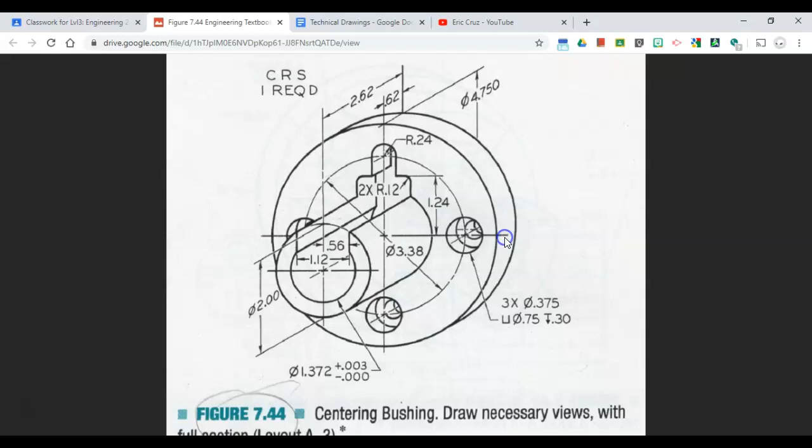Alright guys, we have figure 7.44 here, and what I want you to do is really look closely at the dimensions. This part is pretty straightforward if you can understand all of the dimensions that you see here.

So let's fire up Autodesk Inventor. Let's start a new part. This is all in inches, so we don't need to change any of the dimension properties. Start a sketch on the XY plane.

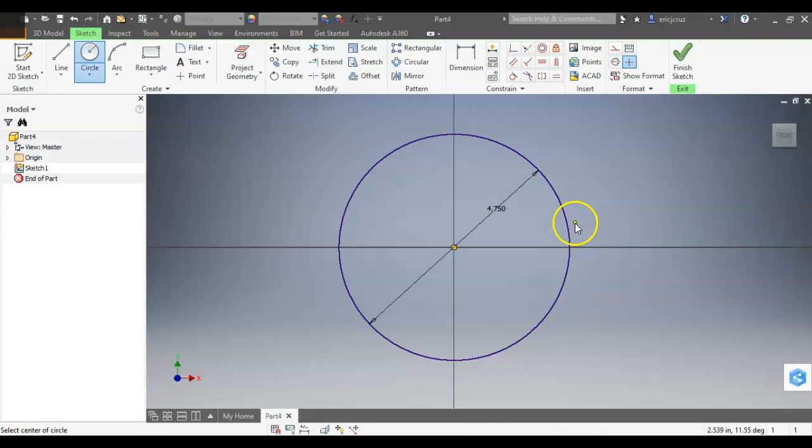Click on your circle tool and the origin, click and go out, and our big diameter here is 4.75. Enter. Use your mouse wheel to scroll in and out. Let's finish that sketch. Click on home.

That's 0.62 thick, we see that right here. So extrude by 0.62. Enter.

Then we're going to make this cylinder. So right click, new sketch on that circular surface. Start at the origin, and it shows right here the diameter is 2 inches. Enter, and finish sketch.

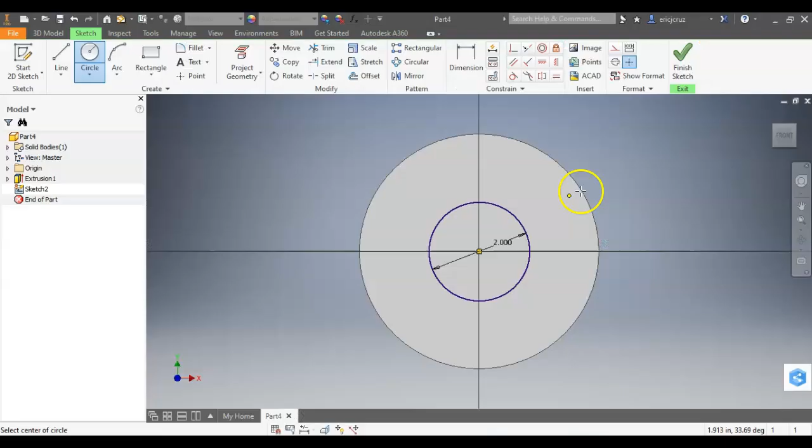It says it's coming out from the back edge to right here, 2.62. We know that this is already 0.62, so from this surface we only have to extrude out 2 inches. So extrude, click that, type 2, and enter.

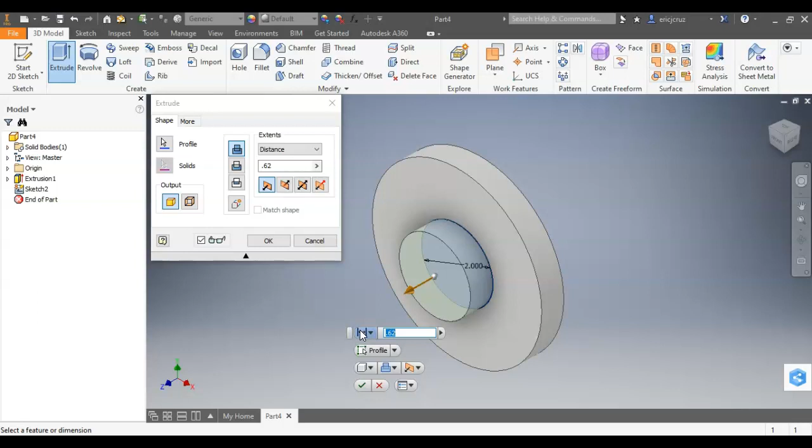So now we have the basic shape all done. We're going to cut this hole out, and then we'll cut like a rounded square or rectangle, followed by this keyhole, and then we'll make the points for these holes.

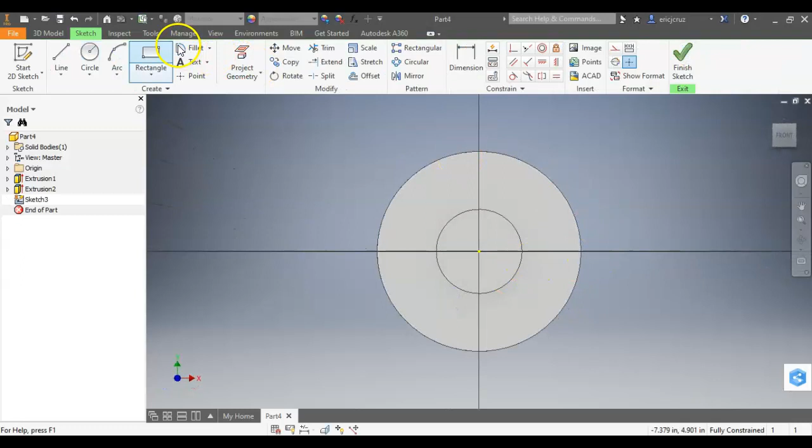So this hole right here is going to be 1.372. Right click, new sketch, just make a circle, and the diameter is 1.372. Enter, finish sketch, extrude cut the whole way, distance all.

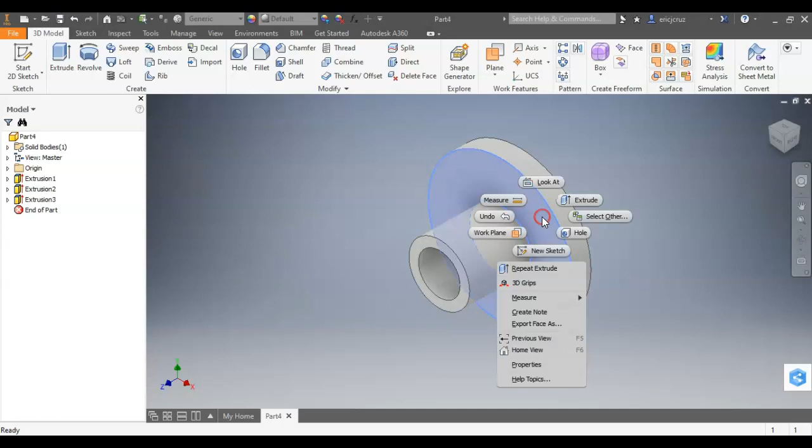Let's make the holes next because that's easiest. So on this surface, right click, new sketch. I'm going to draw a circle. It shows us right here there's a diametered circle that's 3.38, and that's the center point of these points. So from the origin, make that 3.38.

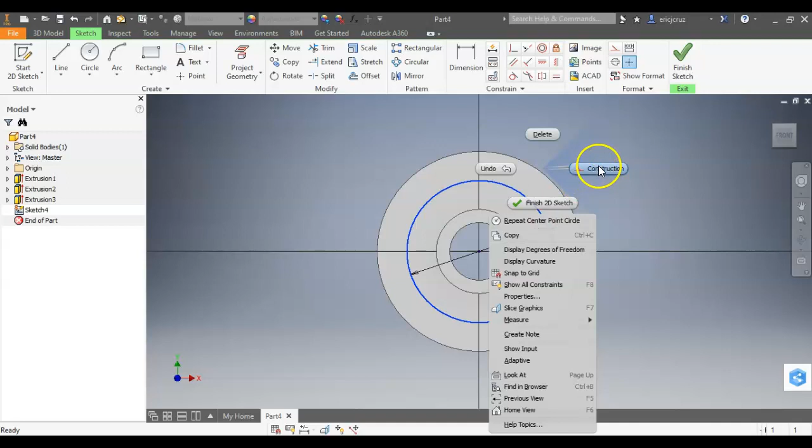I'm going to right click on that circle and turn it into a construction line. Then we're going to click the points button, click right there, click right there, and click right there, and finish sketch. Now it shows us that the inner diameter is 0.375, the outer diameter is 0.75, and between here and here it's going down 0.3.

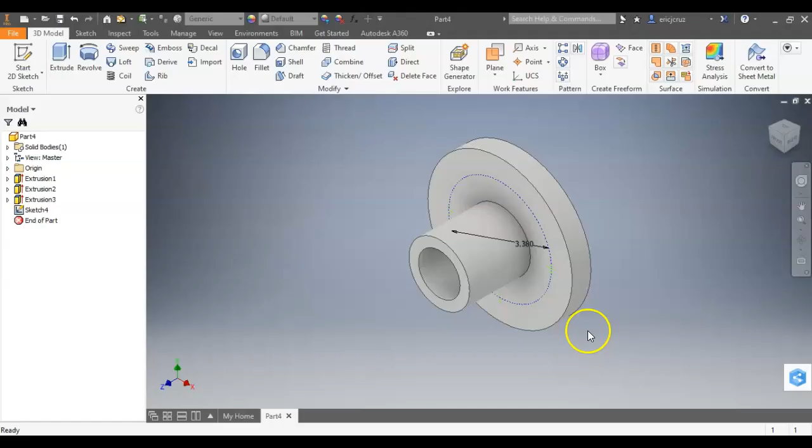So let's click on hole, and we're going to use this guy right here. So it's showing us the outside diameter is 0.375. The downward, that's this one, this downward is 0.3, so let's change this one to 0.3. And the inside one is 0.75.

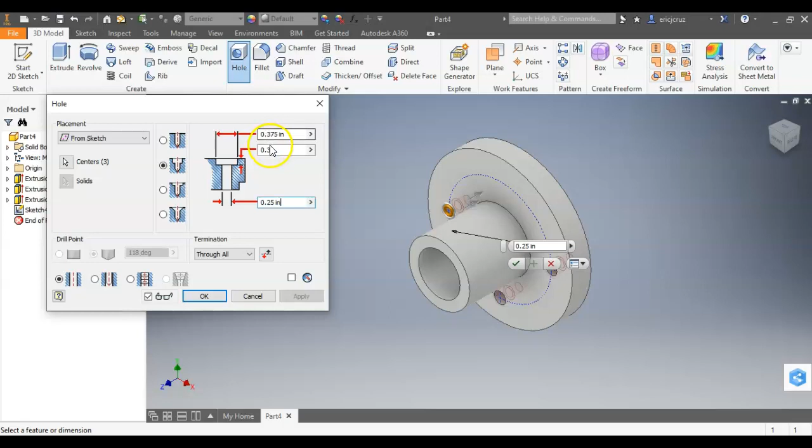So I think that's backwards, so that's 0.75. There we go, yep. And then this one is 0.375. You can zoom in to double check if it looks like the drawing. Click OK.

And then the next step is to make this, it looks like a keyhole type of thing. So this is a centering bushing. It's using parts, machines to center things that spin.

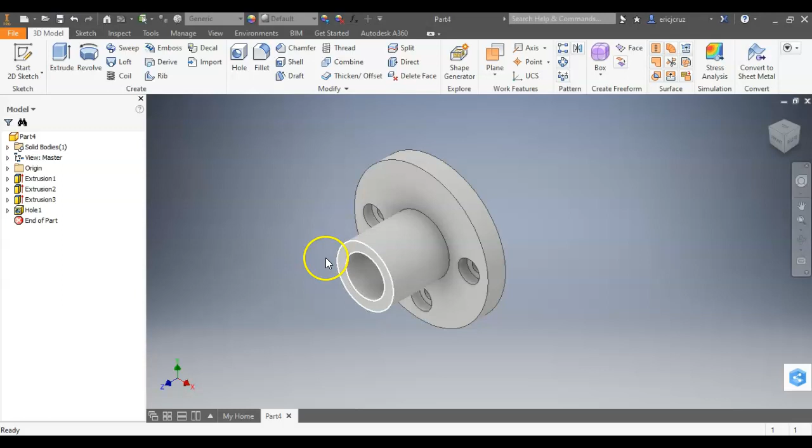Alright, so I'm going to draw this cutout on this surface. So right here, find this surface, right click, new sketch. And we're going to project the geometry of those two things. Click or press escape.

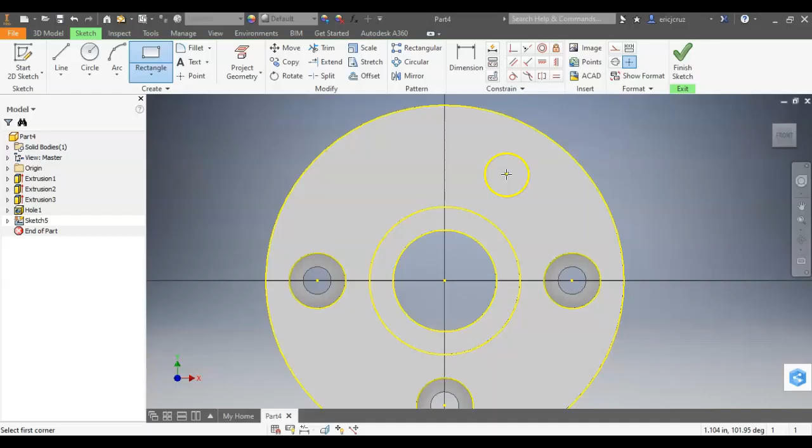And from the center out, it's 0.56 here. So what I'm going to do is draw a rectangle, just like that, and then dimension it, I click dimension. From the center to the right is 0.56. That means that from the center on the left is also 0.56.

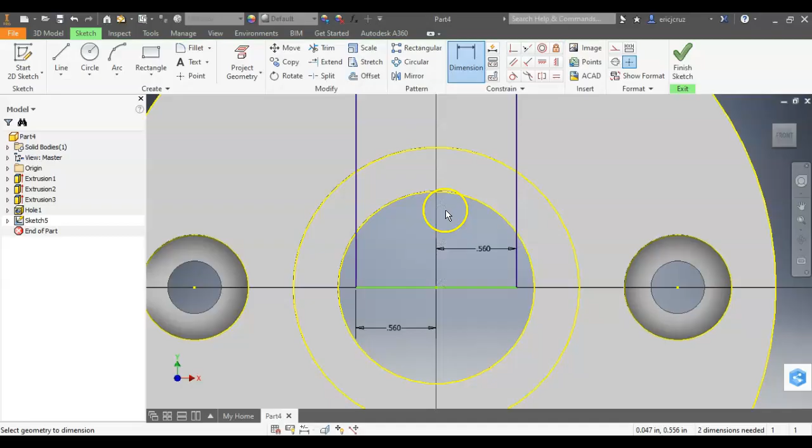And then the height. So from the center, we see the center right here. So from the bottom of that rectangle to the top of it, it's 1.24. Click dimension, click the top, click the bottom, make that 1.24. Oopsies, press enter.

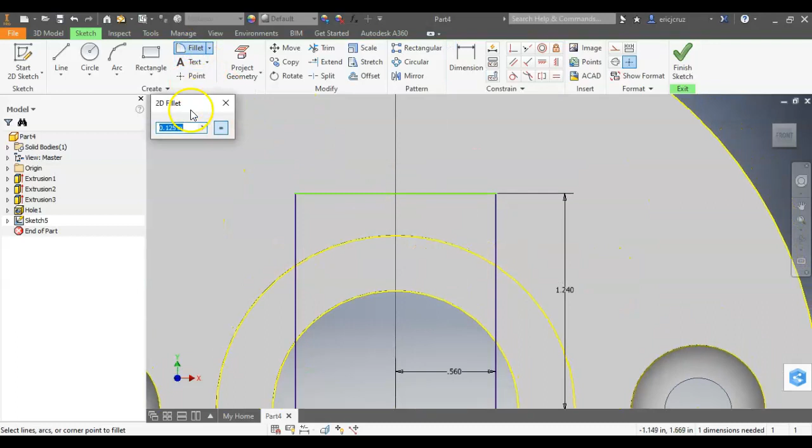This radius right here is 0.12, and here's a neat trick: click on fillet, type 0.125, move your mouse right to the corner. See how it makes it a fillet? Do that on both sides.

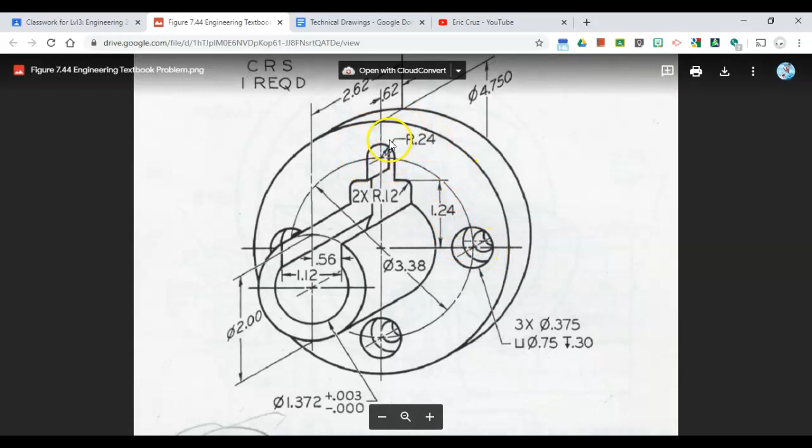Close that. Our next step is we're going to make a circle and then tangent 2 straight lines. So I'm going to click here, find the center. That radius is 0.24, so right click, click radius, that's 0.24.

And then the distance. So the center of this circle right here is the same, it should be lined up with that same point. So what I'll do is I'll draw another circle from the center of everything and make it 3.38.

Oh wait, whoops. I left my dimensions on radius, which is why it didn't work. I'm just going to press Control Z for undo. Try again. Right click, we want diameter.

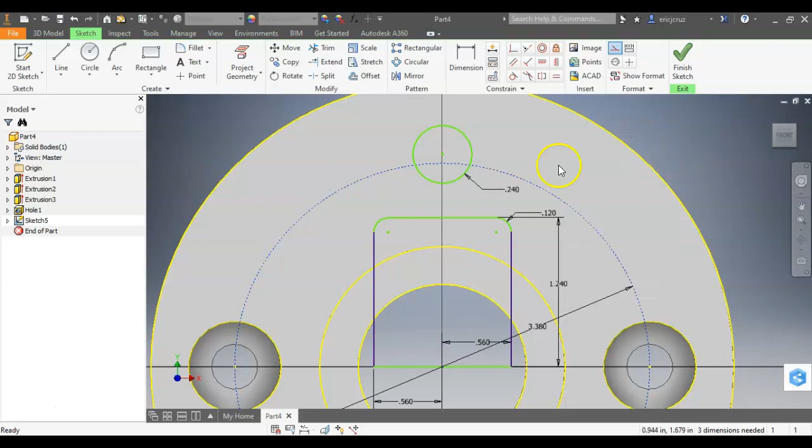We want that to be 3.38. Okay, escape. Right click on that circle, make it a construction line. And then this center should be right here. So I'm going to click coincident constrain, click on the center of that circle and then click on the circle.

Then I'm going to use the line tool. I'm going to just draw a line like that. Click on tangent. There we go.

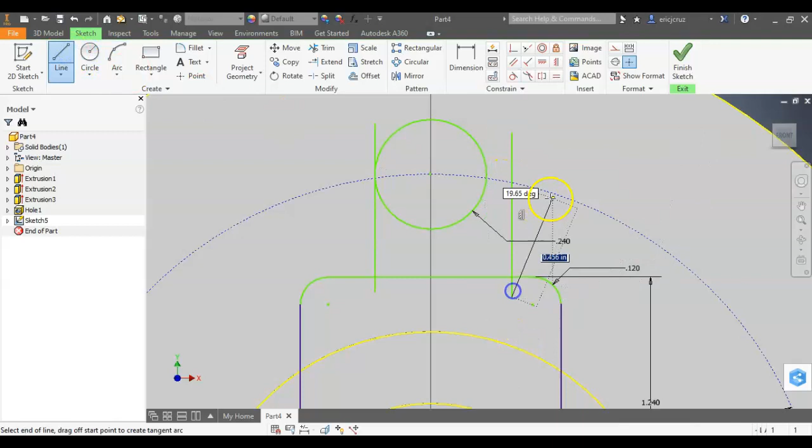And then do the same thing on this side. I'd rather do it like this because I want to make sure that when I trim things, I have an actual shape. I'm going to click the X for trim and trim away these parts. So I'm left with that shape.

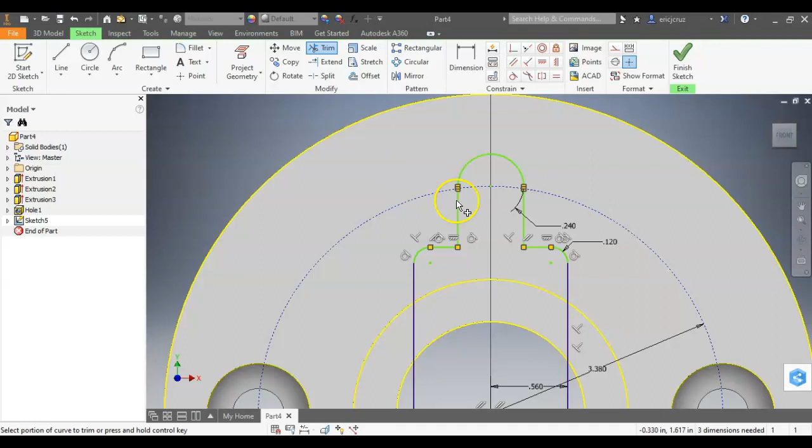Okay, and let's see, do I need anything else? Just dimension things like this just in case. Yeah, I'm going to do that on this one too, except...

I don't think I need this dimension, but I'm going to do it anyway. And then it says I need more dimensions, but I don't think so. What about this dimension?

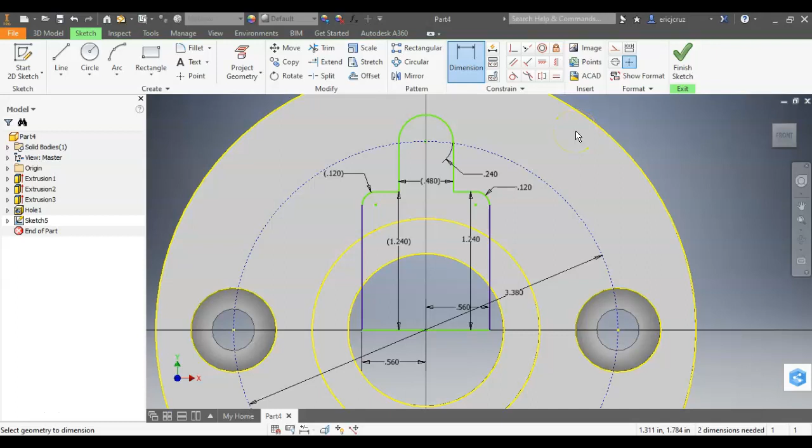Alright, finish sketch. And now you're left with all this stuff. So if you have yellow lines left over, should be able to - let's see, can I turn that off? I don't think I can turn that off. If I click here, projected loop - it's okay, don't worry about it.

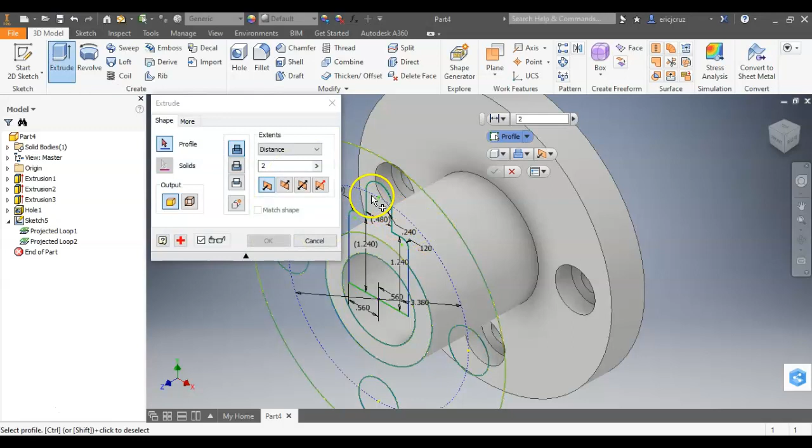We should be able to click on extrude, and that shape should fill up. We're going to click cut all, and click OK. There it is, that's what we want. There's the front view. Boom. You just completed a college level part in 9 minutes.

Alright, so we're going to save it and start the technical drawing. So this is figure 7.44. Oopsies. Save.

New part - I'm sorry, not new part. Whoopsies, I meant drawing. New drawing. Sheet size set A. Drawing resources, title block, ANSI-A, insert, base. It's scaled to 1/2.

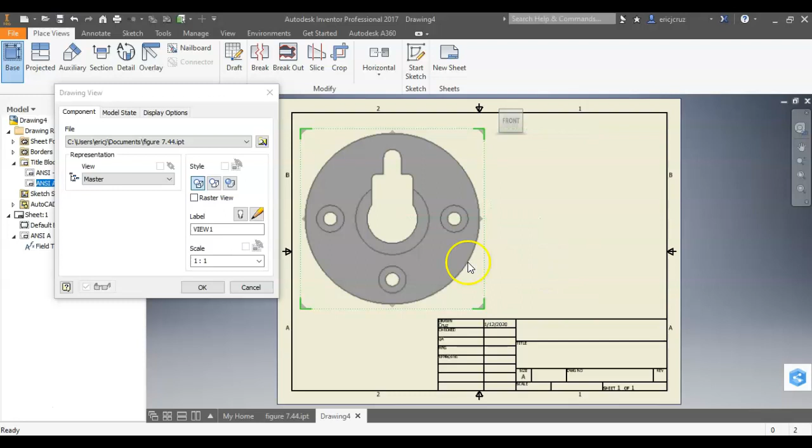Let's see what 1:1 looks like. It's kind of big. Alright, let's leave it at half scale. Click OK.

I'm going to shade the isometric. And let's start annotating. Let's put center lines everywhere.

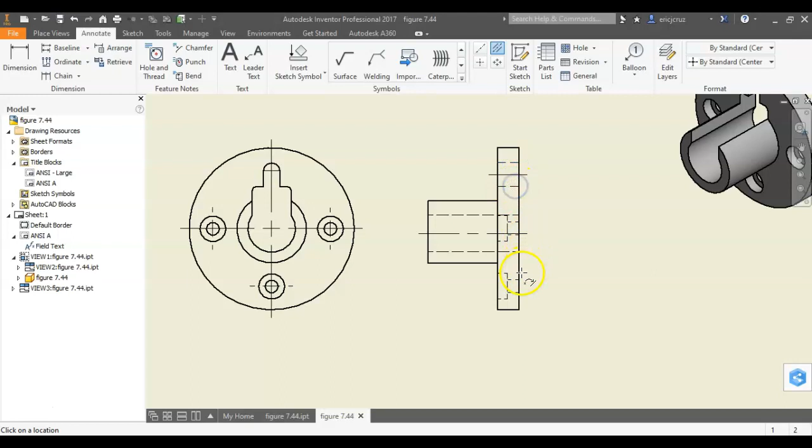And let's dimension this stuff. This guy should be - if I click on the center one, it should give me - oh, you know what, delete that. I think we want Hole and Thread. There we go, that's what we want.

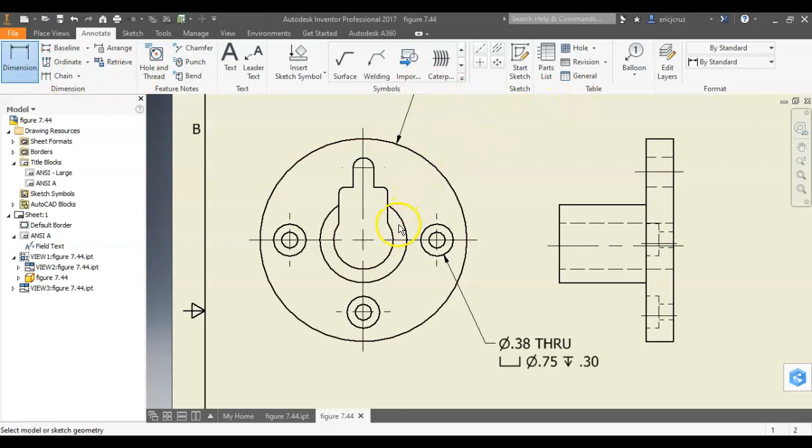There it is. Hole and Thread makes sense, so when you see that, that's what we want. Dimension, we're going to dimension this guy right here. We want the dimension type to be diameter. This one right here, let's make that diameter too.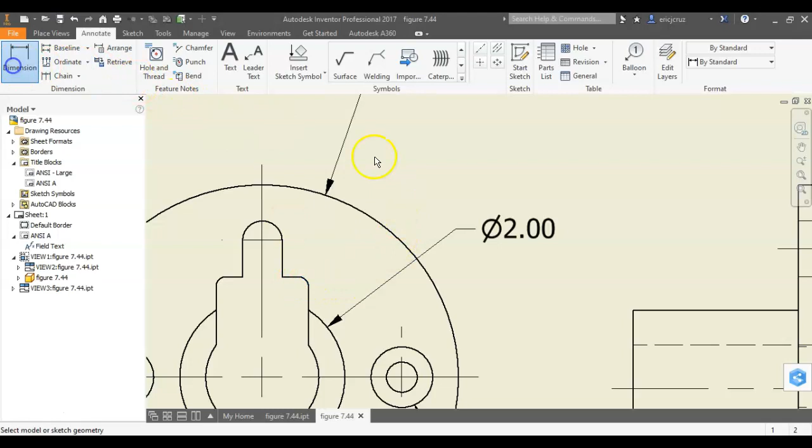So you right click. Okay, and then this guy right here. Oopsies, dimension, bam. And this one right here.

Alright, now we just need some lengths. So from here to here. From here to here. We need the center, so from here to here.

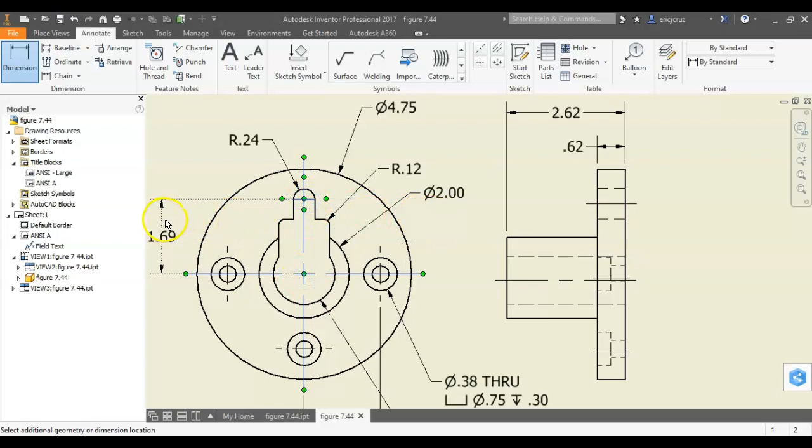Yeah, from here to here, that should be... So I'm breaking the dimension guideline rules right now. That's okay, I'll just move this over a bit.

There we go. I think that's fully dimensioned. Am I missing anything? Let me know if I'm missing anything. Oh, right here, that's 2x.

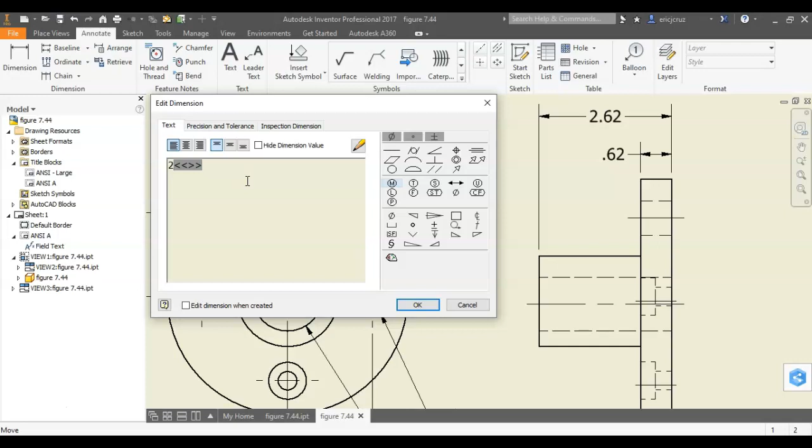So, double click. Move your cursor all the way to the left. Type 2x, capital X, and okay. There we go.

And there it is. There's figure 7.44. Don't forget to update your iProperties.

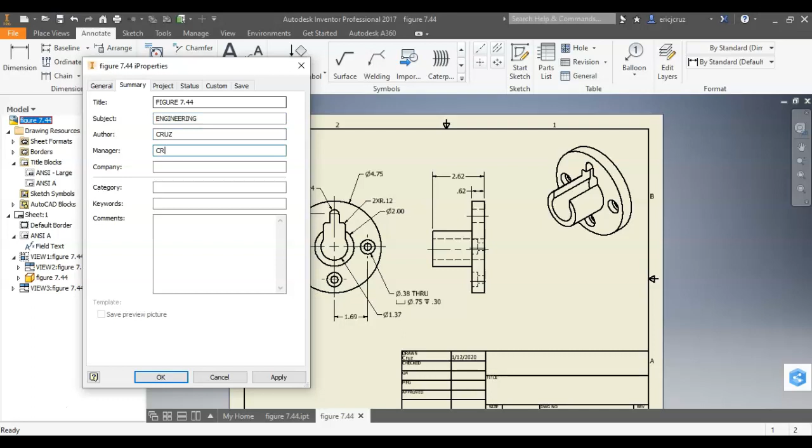So, figure 7.44, engineering. You're the author, I'm the manager. Apply, close. Go ahead and print this.

So Control P, make sure you're on best fit, and click OK. If you're not connected to the printer, make sure you see me. And we're going to start making portfolios for our drawings.